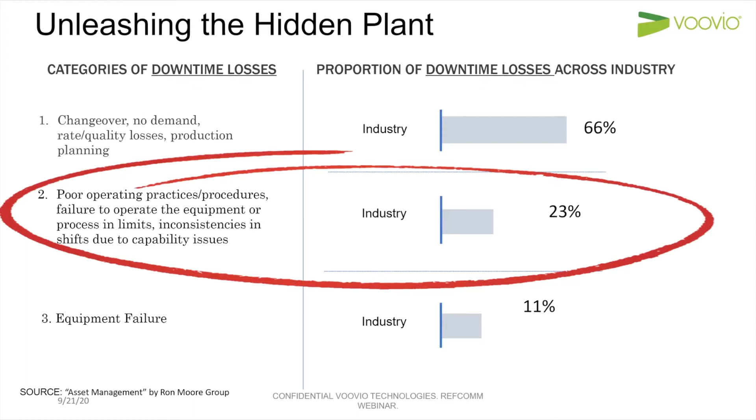So really a key focus point should be on that 23% caused sometimes by human error. It's not intentional or blatant, it's just cases where people just don't know and haven't been given access to the skills and knowledge.

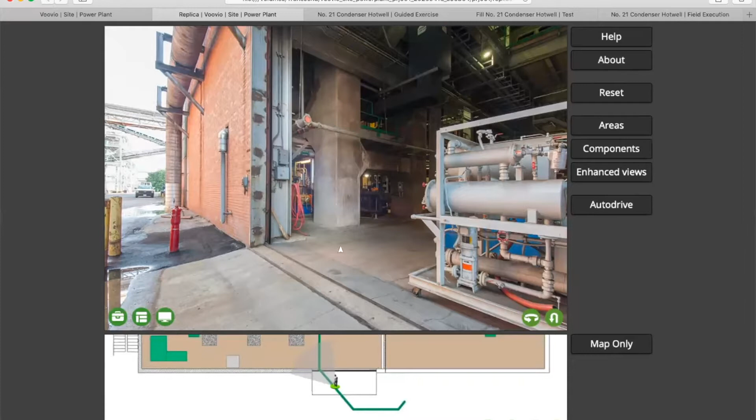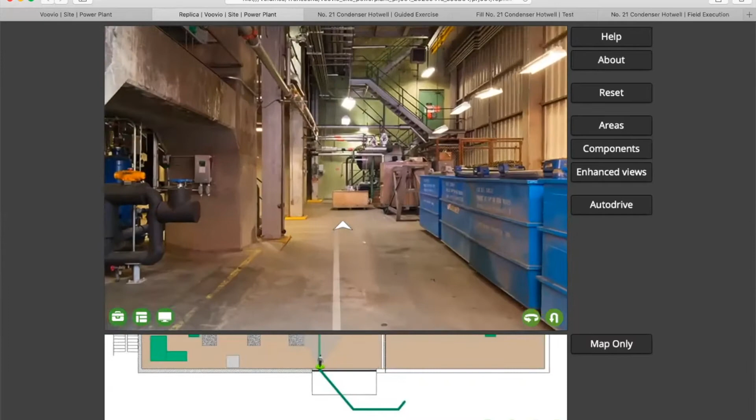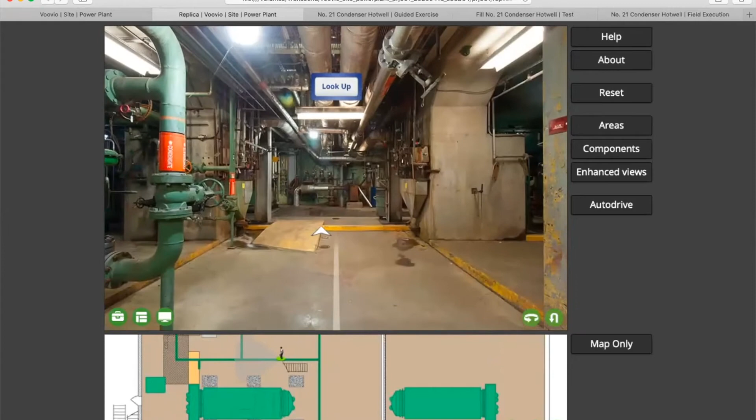So let me start off with this. I'm using my laptop here, sitting remotely, so I'm going to take my mouse and start walking through the digital replica. This is a utilities complex, and what's unique about this digital replica is it's built using real photographs, creating this immersive, realistic environment. Hopefully it's smooth as we're transitioning through the images. It's on my computer, but it's something you can share virtually on Teams or Zoom like we are right now. You basically have the freedom to move around the unit or the process area, turn around, look around, so it's your plant on the screen.

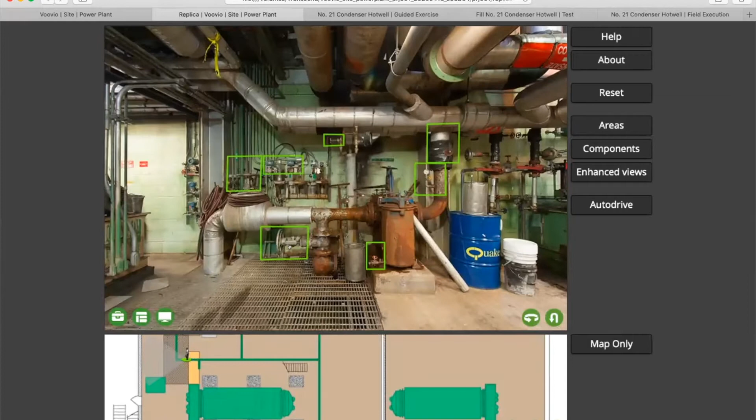And you'll notice now there are some green boxes. Here you're able to tag pieces of equipment, whether it's vessels, pumps, or components like valves and control panels. There are labels or IDs that appear, and if you select one of these, you get a detailed view of that component. And here, this is where I want to bring in the simulation.

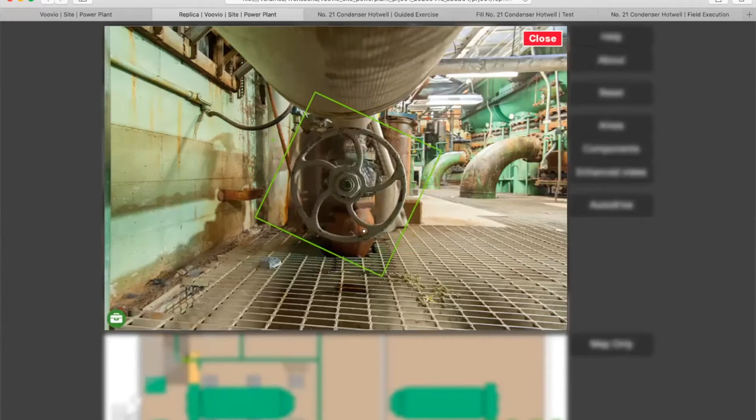So I can actually grab this valve with my mouse or my finger and rotate it. Of course, wheel valves you would rotate. Other types of valves or instruments also behave as they would in real life. So this lever valve I can open. There's a lot of capability in terms of being able to replicate the real functionality of equipment.

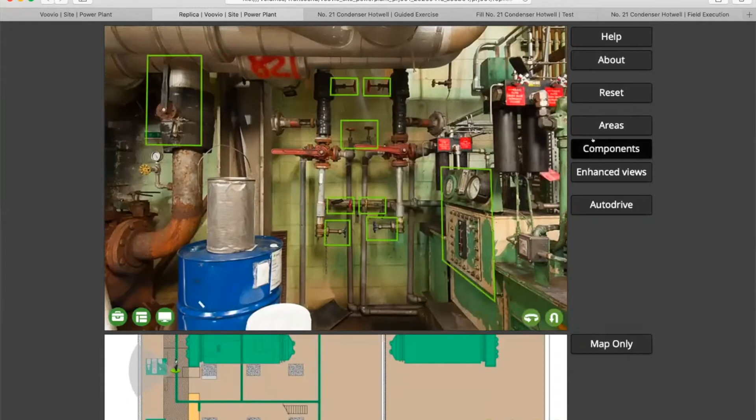So you'll see as I'm walking around, there's other pieces of equipment tagged and labeled. And all of these are listed in a searchable index, so operators or maintenance technicians can select things in the index, or search for things. If I type in 99 here in the search box, I can select one of these valves, and it will take me straight to that location. So operators and maintenance technicians, or anyone, can find things independently without having to rely on others.

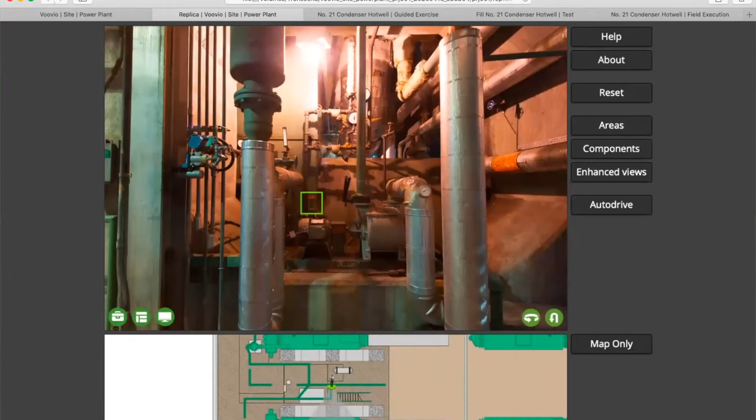And again, this is available 24/7. So you'll see how this can be used for planning day-to-day activities, onboarding, lockout, tagouts, line breaks, or confined space strategies, with all of this available on your laptop or tablet.

One other thing I want to show you is what we call enhanced views. These can be embedded all around the replica. Gabe, who you'll hear from later, has several of these. So we can take an image and overlay the flows, which I can activate by these icons at the bottom here.

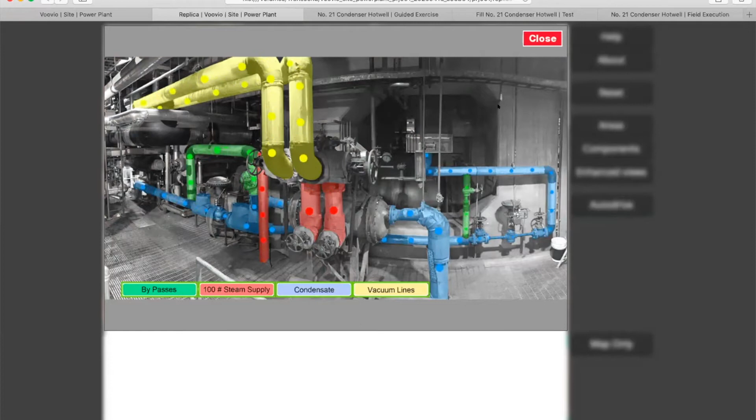So I can select, for example, condensate in the blue. I can switch it on and off. And there you have an unambiguous view of that system.

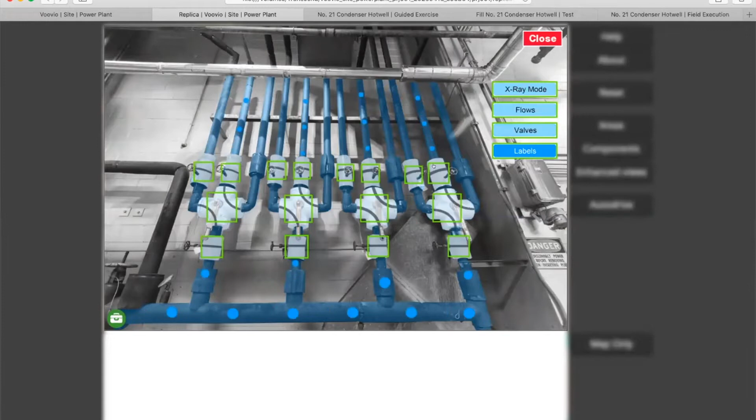Taking that a step further, that interactivity and those flows, if you have a complex manifold like we do here, I can activate the flows and the valves. You'll see here, I've activated the valves and the labels as well, which you can organize in different ways. But notice when I take my mouse here in the bottom right, and I click on this valve, you'll see that the flow now corresponds to the position of that valve. So again, it's an unambiguous representation of the real plant, which has huge onboarding and refresher value.

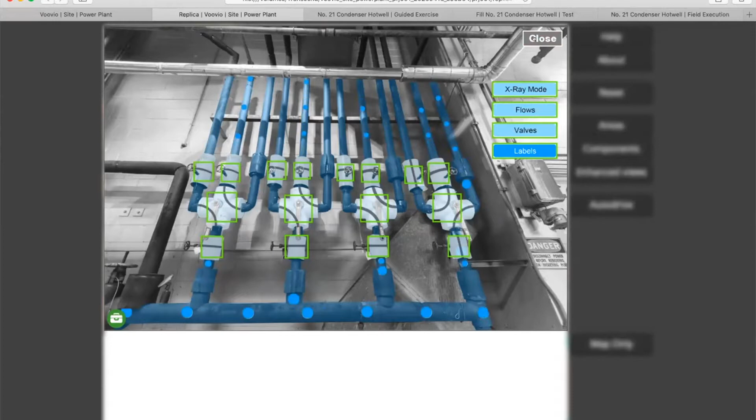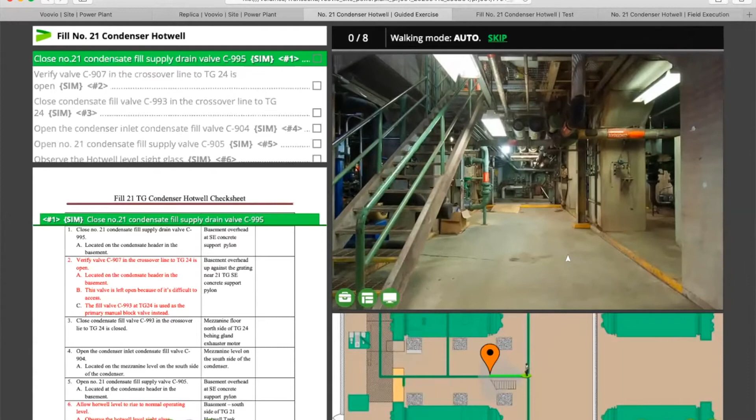So this is all in the digital replica. The second part of this was procedure simulators, so this is what I'm going to show you next. I'm going to show you two things here: one is called the guided module, which you're looking at right now, and the other one is a test module. But on the screen, let me just explain what you see.

So you have the replica here on the right. You have your map or plot plan at the bottom, so you always know where you are. Your procedure is on the left. This would be BASF's procedure or anyone else's. We do not edit this or create this. This is a PDF of that procedure. Above that, we have an action checklist.

This is so operators focus on one action at a time, because after all, we are simulating actions. So an example would be if your procedure says close all the drain valves, and that's all it said, but there were 11 drain valves, we would have 11 line items up here, so you can do them in the correct sequence and you don't forget one of them.

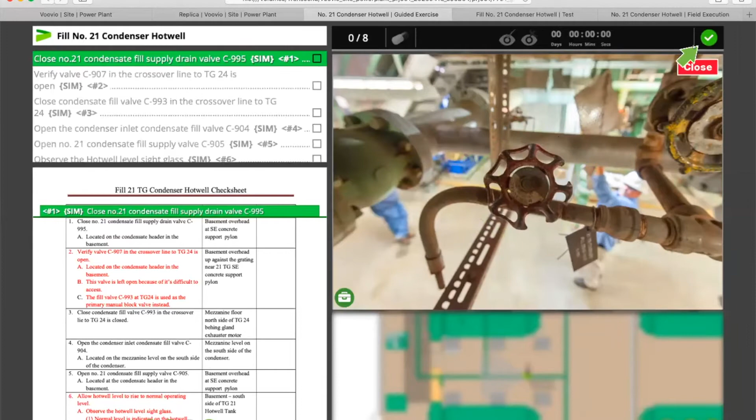So let me do the first couple of steps here. I'm going to physically close this valve, so you're forced to interact. And once I've completed it, I'm going to confirm, and it will move me to the next step of the procedure. So it's very much like a virtual SME guiding you around.

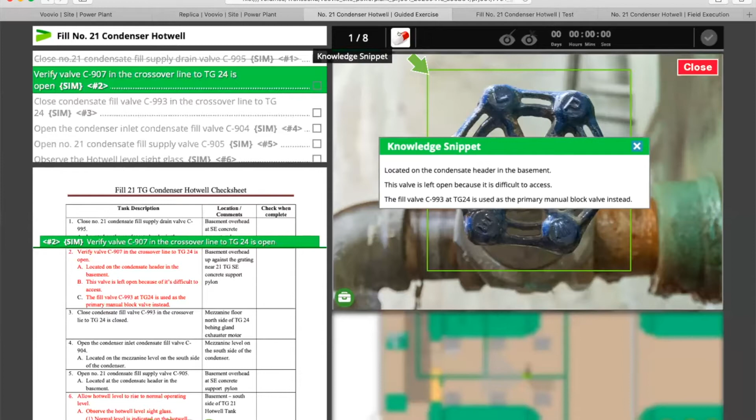There are these very useful knowledge transfer features here that you see called a knowledge snippet. So you can utilize these anywhere at any step in a procedure and embed that critical knowledge or that tribal knowledge, which may not be in the procedure. You could even have a video in here or any multimedia content, cautions, notes, that kind of thing, so that knowledge from the 20, 30-year veterans is easily transferred to the new generation of operators coming in or maintenance technicians.

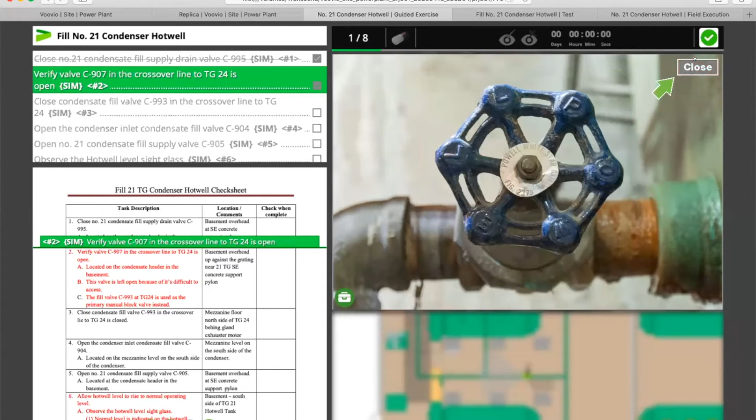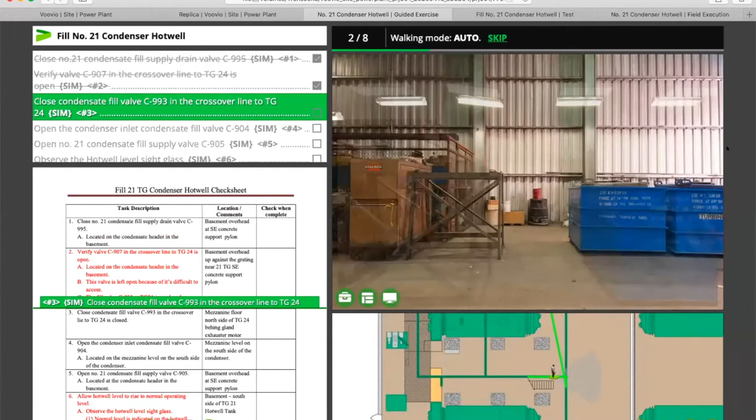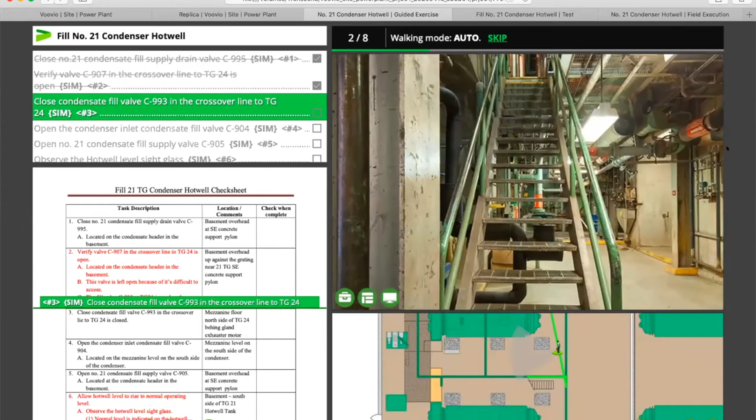So I completed that step, and you'll see the system walk me to the next step. I'm not doing anything here, hence this is called the guided module. As I said, it's like a virtual SME. It allows you to practice and learn full startup procedures, full shutdown procedures, equipment swaps, things that

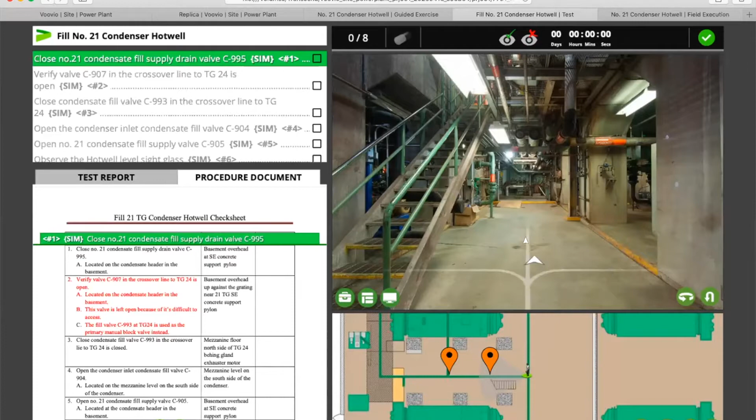they normally would not otherwise get to experience unless the actual situation occurs. So what about testing? Let me show you the testing module quickly. It is the same environment. You have the replica and the same setup, but here you'll notice that if I start walking around the replica, I can walk freely and interact with anything, and I get immediate feedback on everything.

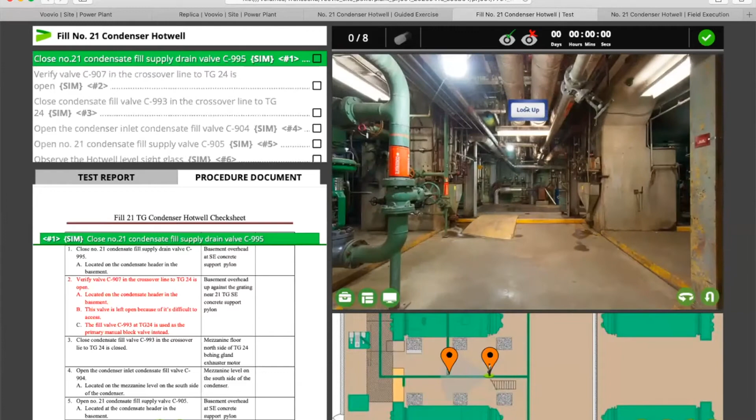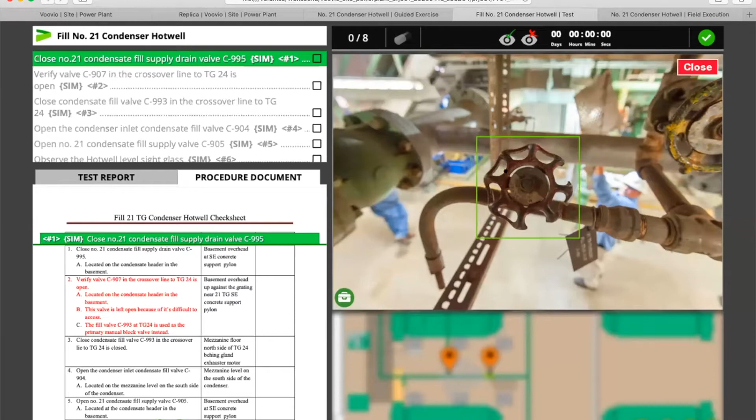So I'm going to show you what happens when I get something correct. I'm going to close this valve here, and then confirm to the system that I've fully closed it. And you'll see in the bottom left, I get immediate feedback saying I got it right.

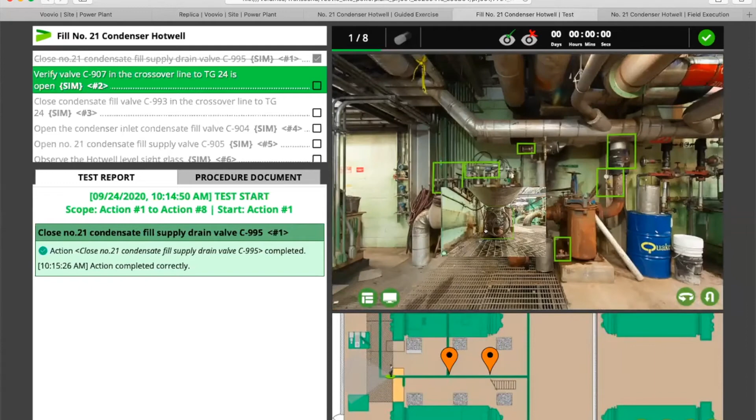So what if I make a mistake? Let me go down to where we were earlier in the digital replica, and you'll see the valves here. I'm going to crack open that valve which I showed you before, just a little bit, and confirm. And you'll see again in the report, I get immediate feedback. I got it wrong, and it even logs which valve I interacted with, which was the wrong one.

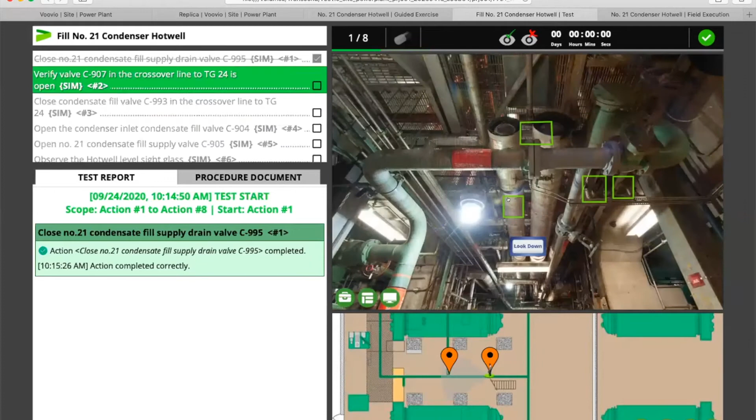You can continue with this error, but here I'm going to try it again using this link in the bottom. And you'll notice when I get this one right, the system actually logs that I had 2 attempts here in the report.

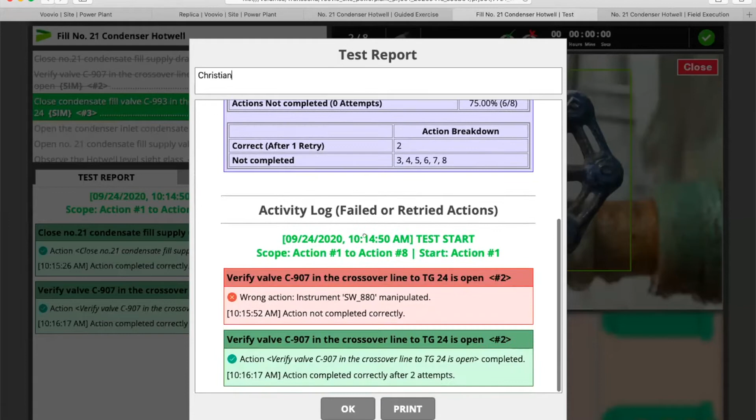So the output of this test module, which is really important, is you get a test report with my performance and also a detailed activity log of where I went wrong. So you can have a standardized way of testing on full procedures, or even just sections of procedures, whatever is most valuable for you.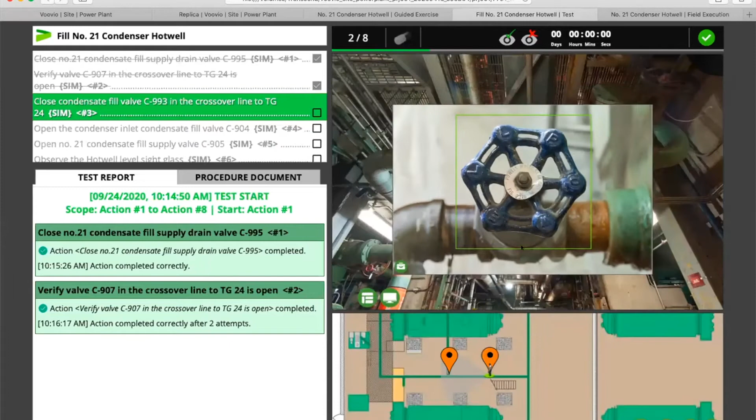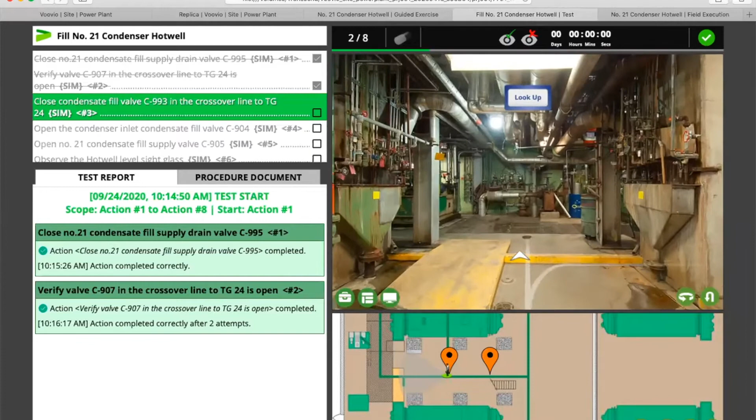And it's important to say that simulation is proven. There's a lot of data that simulation and interacting with the real plant increases the rate of retention and builds competency faster. You'll hear from Fran and Gabe from BASF later about how that happens.

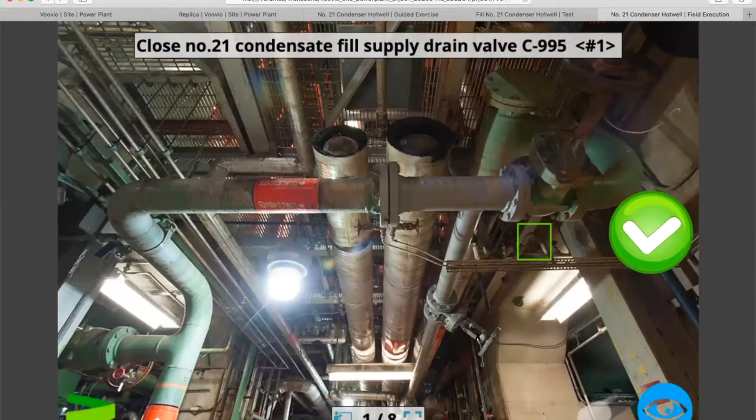I'm just going to finish off with the field execution tool. We get a lot of comments about this, because can you use Voovio in the field? The answer is yes. So this is what you would have on a tablet or a phone in the field. It is drawn from the digital replica and the simulators.

So you have your action at the top. This is action number 1 of 8. And you have an image which shows you where that component is. If you want a close-up of that valve or whatever it is, you just click on it and you get that close-up. So if you're in the field, you have that last, final confirmation that this is the right step in the right location. And then you click the green button to move to step 2.

You also have access to those knowledge snippets in the field. So if there are critical cautions or other things you need to be aware of, notes, they are accessible always in the field, just at the click of that button.

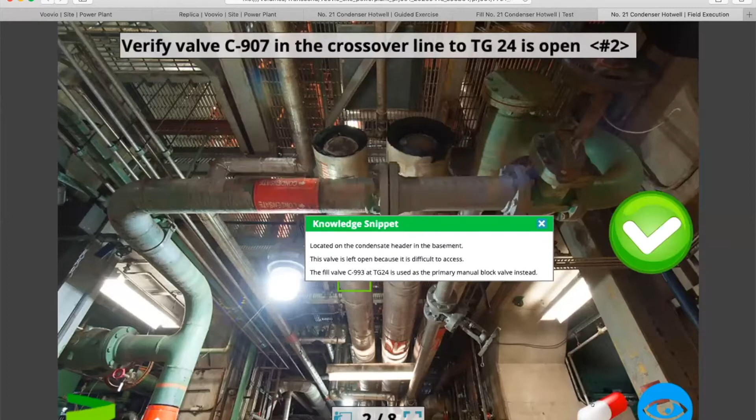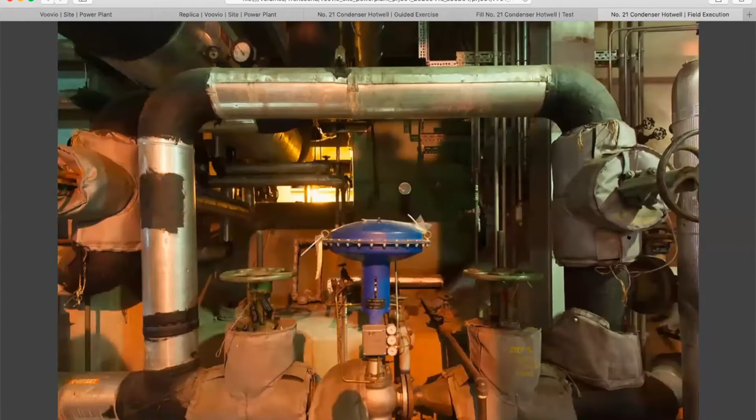And you can also write notes as well. If you need to write a comment, let me just type something in and continue the procedure. At the end, I'll show you quickly, there's an output, a report, which contains all of that information. So you have the time, who it was completed by for each step, and you'll see in step 3, my note. So that data can be extracted and organized however you wish, but it is there, it is captured.

So with that, I want to pass it back to Fran, I believe, who's going to talk about how customers utilize this and some of the results. And then we'll hear from Gabe from BASF.

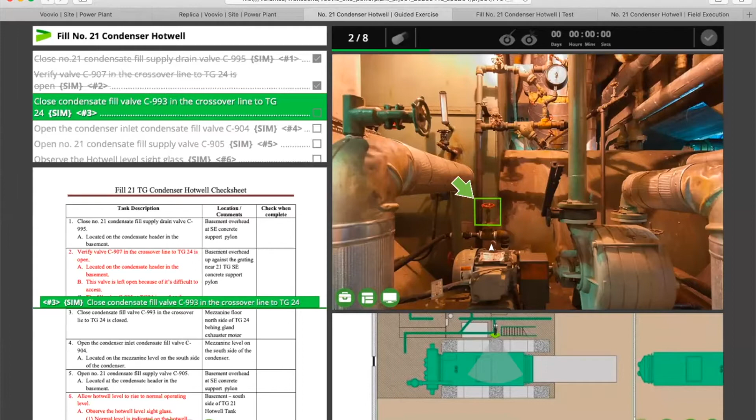Okay, thank you, Christian. As Christian mentioned, I want to share some results that we have collected with the implementations at our customers. This chart shows on the y-axis competency and on the x-axis time. The brownish curve at the bottom is what we have found in industry as a traditional way of training or onboarding operators. They go through an orientation, reading SOPs, and then a period of job shadowing. Along with that job shadowing comes the overtime associated with that training operator or SME. And then there's some type of field demonstration, written test at the end to complete qualification.

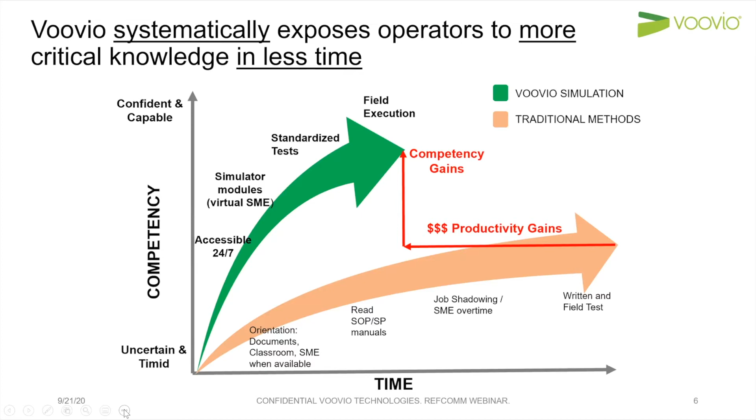With Voovio, what we're finding is the operator is qualifying in about half the time, showing significant productivity gains. And the content they're learning is almost 2x what they're learning, because they're learning the entire procedure, so the competency gains are double. Through access to the operator 24/7, independent of the SME's availability, they're able to learn this content and then demonstrate their capability using a standardized test. It's not dependent on one's knowledge, it's dependent on their knowledge of the procedure.

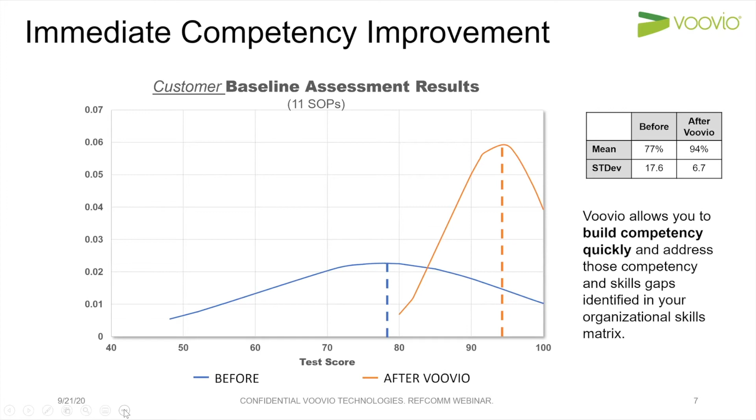So with that, I'll share briefly some of our customers that we've been working with. I'd like to turn it over to Gabe, who's going to share the BASF experience.

Hi, good morning everyone. I'd just like to take a quick minute and take you through a journey with BASF and Voovio, to talk about our experience and implementation. Back in 2017, I was tasked with enhancing our current 5-phase operator training model and developing new ideas for interactive procedures. Our historic training approach was more of a self-directed approach. We relied on operators' ability to read and comprehend numerous procedures, and Fran spoke on that on the previous slide.

As we started looking at this, we noticed how society has changed significantly over the last 10 years. When people want some type of information quickly, the first thing they're going to do is Google it, or go to YouTube. I mean, this is the first thing I do now. With the change in society, everything has gone digital, so we want to keep up with the times. The ability to access specific information virtually or on demand is the new norm, especially with the newer generation, the Generation Zs. Everybody's grown up with some type of device in their hand, whether it's an iPad or a phone.

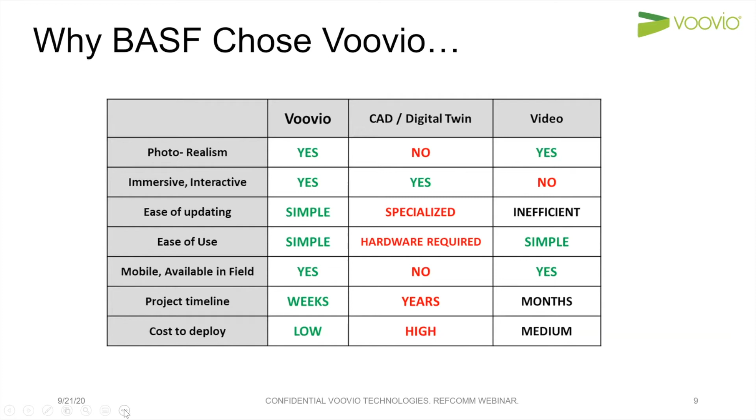So Ron, if you'll swap over to that next slide.

As a site, we were looking at a call to action, and we really wanted to improve our equipment reliability, reduce downtime, and maximize profitability. A key part of that reliability strategy is the human component. So when you start looking at equipment reliability and downtime, how much of that is associated with the human error component? When we dug into that, it's a huge piece.

That's where we really wanted to focus as a site. This is where we wanted to implement Voovio, to help provide our DCS field operators with the right tools to reduce downtime and improve on that equipment reliability strategy. Especially in the times we're in now, we need our equipment to run. We don't need the downtime. Anything that we can make, we want everything running.

We also wanted a process to capture the knowledge of experienced operators, because with the way people are retiring and the turnover in the industry nowadays, we really need that knowledge to help train the newer generation coming in. By utilizing some of the knowledge snippets that Christian showed during the demo, we were able to capture a lot of that knowledge and put it into knowledge snippets to pass on to our newer operators.

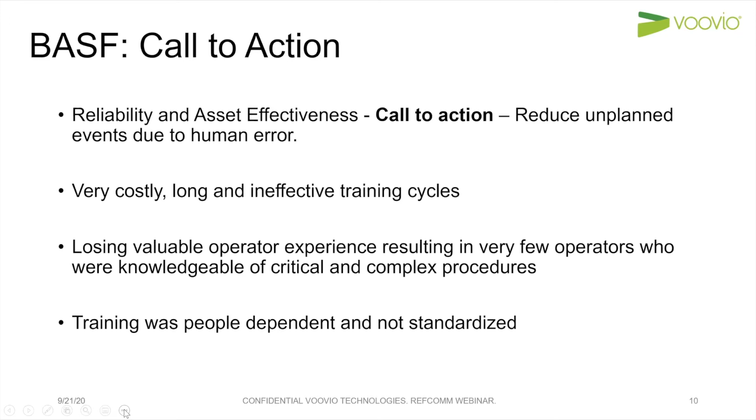We also wanted them to be able to refresh on critical procedures or tasks. If we're going into an outage, or shutting down or starting up a piece of equipment we don't do often, we want to sit down and have them go through these modules, and have supervisors sit down and share to make sure everybody's on the same page. So with that, Ron, go to the next slide.

With that, we saw a lot of benefits. Looking at our operator onboarding, we reduced dependency on SMEs by 50%. What does that mean? We would take a subject matter expert and put them with our new operators to work with them and train them. Once we brought in the Voovio simulations, we cut that in half. It was amazing how quickly an operator could pick up a complicated piece of equipment, understand it, and be able to operate it that much quicker. We cut 50% of that subject matter expert's time, and depending on how many people you're hiring, that's a significant amount of money.

We also reduced our unplanned events and startup delays, with savings of greater than $500,000 a year on our critical procedures. Just a few of our highlights.

We have a large cogeneration unit making steam and electricity. Prior to implementing simulations on this large, complicated piece of equipment, we saw startup delays and had to bring in extra overtime because people didn't really understand the equipment. In loss of steam and electricity, that was anywhere from $35,000 to $50,000 a day. Since we've been training using the new simulations, that has been at zero. We've saved a significant amount of money on that.

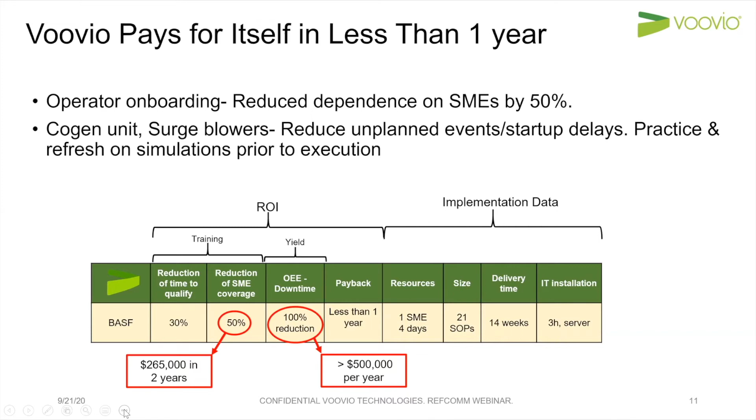With that said, we're continuing to look for new opportunities to implement Voovio for training and equipment reliability, for that increased profitability. So with that, thank you for your time, and I hope I was able to provide a little bit of useful information.

So with that, quickly, just to summarize what Voovio can deliver to a manufacturing environment or plant site: it is the real plant, the operator's plant on the screen. It's accessible on any device, easy to scale, and easy to update. With the significant amount of change that occurs on a plant site in any given year, any solution needs to be easy to update so operators recognize it when they go out in the area.

Again, it's a virtual SME available all the time. It is not people dependent, it's on the network and ready for the operator to use it when they have time. It is proven to increase operator competency and give them the confidence to operate equipment they have not operated in the past due to equipment availability.

Our system does provide documented testing and documented results. It's a great tool even for the 3-year refresher training required by the regulatory agencies. And you can see the results: the overtime associated with training and specialized call-ins, the reduced qualification timing, and even the documented savings that Gabe shared around reduction and elimination of unplanned downtime.

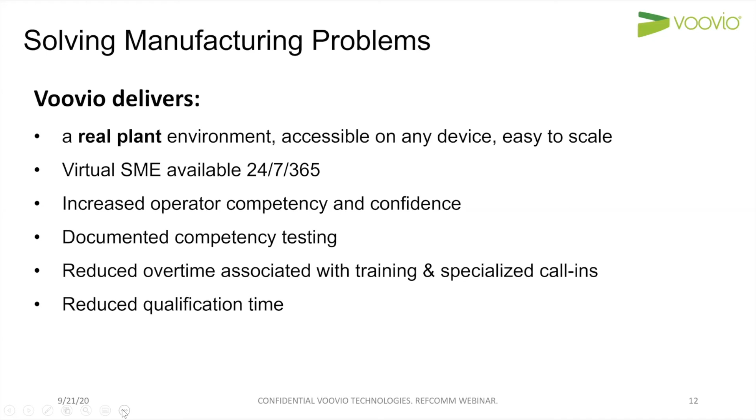Okay, so the first question is, how has Voovio been utilized during the current pandemic?

Gabe? Yeah, okay, I'll take that one because we've actually utilized that. We are a union site, so we have business contingency plans around our contract, but we've never had to train staff as quickly as we had to for this pandemic.

So March 13th, all staff began working from home. March 27th, we had to figure out how to qualify our staff personnel to man the plant, because we had so many operators going out with COVID or going into quarantine. So we had to come up with a plan, and we at the site were scrambling to figure out how we could train from home.